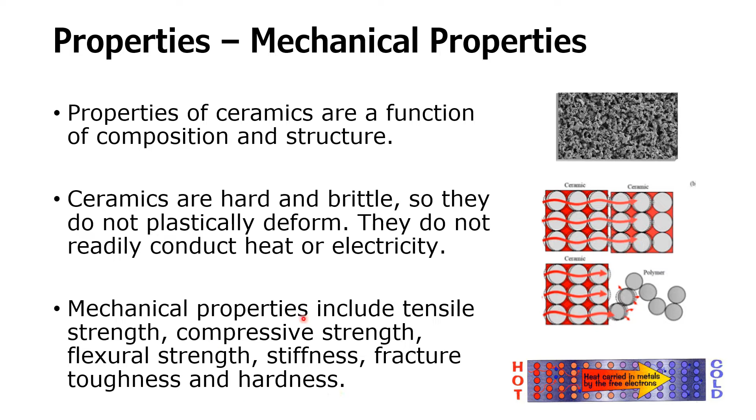This is showing ceramics and your plastic polymer here. Polymer is even more difficult. So for mechanical properties, we would take a look at tensile strength, compressive strength, flexural strength, stiffness, fracture toughness, and hardness. These are all the properties we'll take a look at in this unit.

Ceramic is composed of various sized particles, so when they fuse together, there are voids and small cracks produced inside of the ceramic body. So ceramics in tension or under tension, these voids are their weaknesses, and failure usually happens at these places where the voids are.

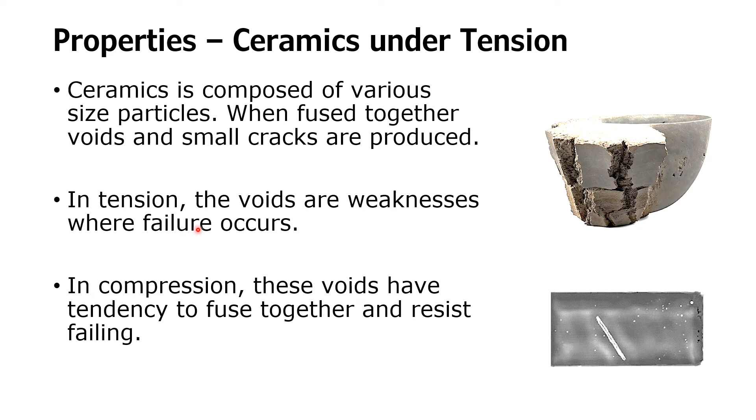In compression, these voids have a tendency to fuse together, and by doing so they resist failing, and that happens only in compression. For tension, failure will happen because of these voids.

Ceramics have been used for applications where resistance to compressive forces is required. So compressive strength in ceramic is many times greater than the tensile strength.

Some students may have difficulty if you're not an engineering student or don't have a lot of engineering or science background. Try to understand compression like these arrows - the force is going to go inward. Tension is kind of like that, when the material is applied some sort of stress or load. Compression going in, tension coming out. And that strength for this material is greater than that strength for the same material, meaning that it will compress more than it will go into tension.

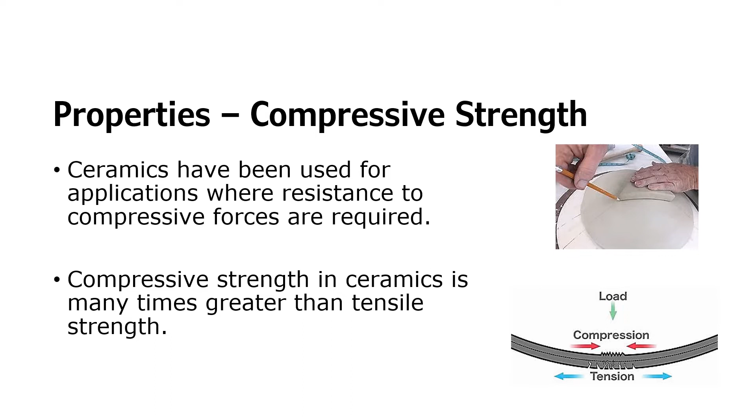So it's very possible to achieve high tensile strength - we can go from 0.7 mega psi to 1.4 mega psi in newly drawn glass fiber. Glass again is a ceramic. When we say fiber, we're talking about them at the molecular level. Big M is 10 to the power 6. So in practice, if you have a very small flaw in glass fiber, it's going to dramatically decrease that tensile strength, even if it can go so high. One single flaw can mess up everything, so you have to be very, very careful.

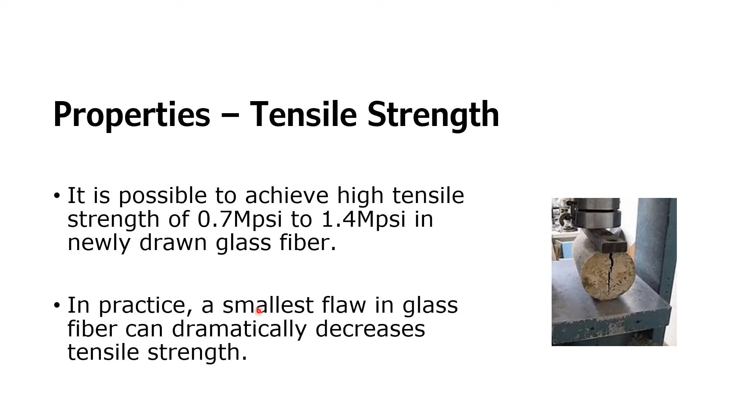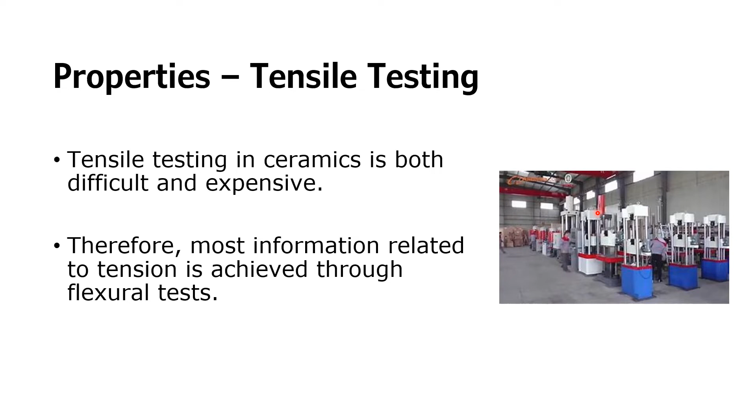We can test the tensile strength of ceramics, but the testing is difficult and also expensive. We don't call it tensile testing in ceramics - those tests are called Flexural tests. So all information related to tension of ceramics is achieved through Flexural tests.

The Flexural test is performed this way: you're going to have a beam of your sample, a standard size. It has to be a standard size because if you want to compare the tensile strength of different ceramic types, you need to have a reference, and we usually make the reference a standard size.

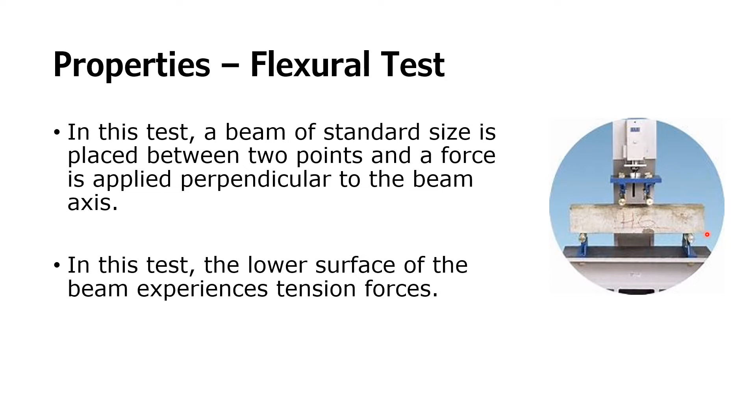You're going to place that beam between two points, and then apply the force perpendicular to the beam. So the force the beam experiences is going to be on its lower surface. Here you can see the beam, and the force is applied with this machine perpendicular to the axis of that beam. So the beam is going to experience the tension forces on its lower surface - don't forget that.

So flexural strength, we are going to calculate it by using this formula. MOR is modulus of rupture, and that is for the flexural strength.

We're gonna apply the force, the perpendicular force, and then your beam length, that's the ceramic length, ceramic beam, standard size length. You're gonna times with 3 divided by the width of the test specimen, that's your B, meaning like the width of that beam, and then your height. So your L, your B for width, and then your height H of the specimen, square your height, times 2.

So when you take a look at the mathematical equation here, you can see the flexural strength is inversely proportional to the width and the height square, but directly proportional to the applied force and the length of the beam.

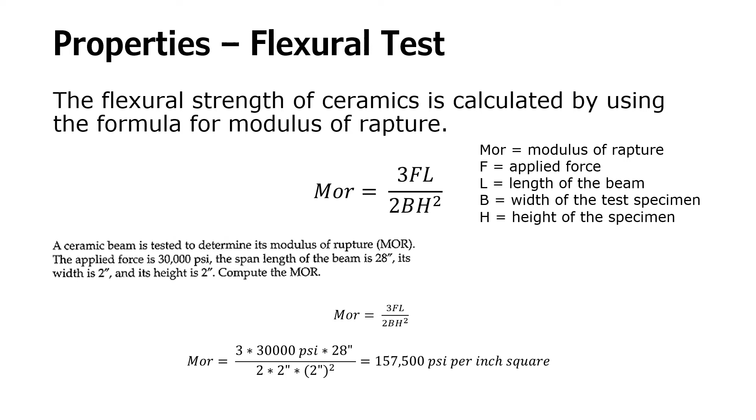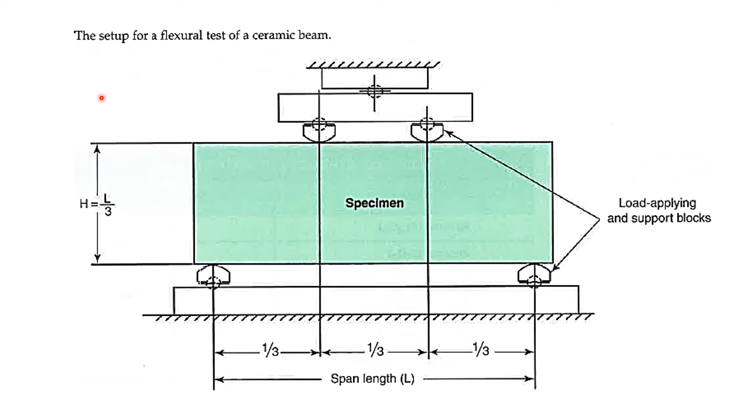So here is your load applying, and these are your support blocks. The force is going to go down that direction. Here they're trying to break it into 3 parts, 3 equal parts. So you have 1/3, 3 times of it. And here is the length divided by 3 is your height.

Alright, so this is another table, and it's showing you the flexural strength of materials. So the materials are that, and here is your modulus of rupture, and the unit is MPa. Alumina 380, and go all the way down to 1378 for tungsten carbide.

So tungsten carbide, where we use for cutting tools, the strength is the highest. If you look for the lowest strength, you can see right there, silicon nitride.

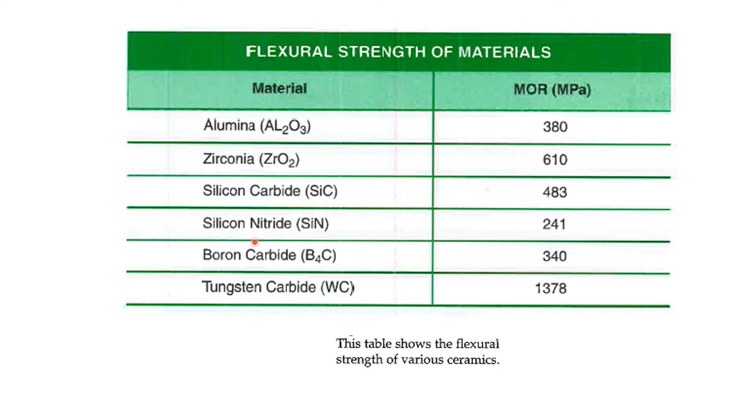Now we're going to get into another property called stiffness. Ceramics have the highest modulus of elasticity of all industrial materials, and they are the stiffest of all engineering materials as well. When you look at advanced ceramics, you can see they can achieve modulus of elasticity 3 times greater than steel. So even though it is clay, you can engineer it for elasticity greater than steel.

Ceramics are really good stuff if you know how to engineer them. The modulus of elasticity can be as high as 65 million psi compared to 29 million psi for steel. That's about 2 times the modulus of elasticity compared to steel.

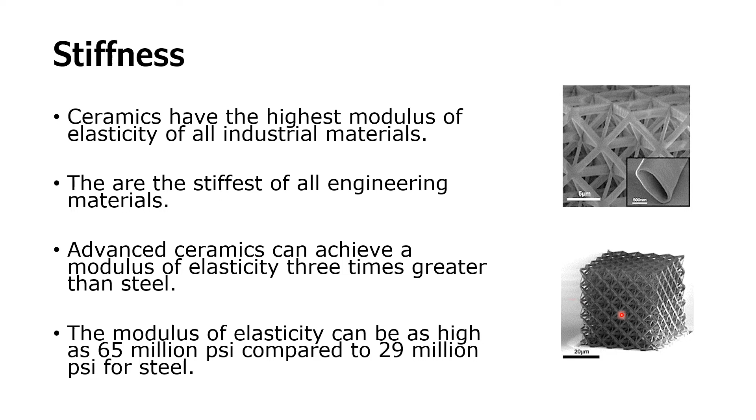This is just showing you the internal structure of a type of ceramics. You can see the crystalline structure right there.

Measure of stiffness, we use modulus of elasticity. You can use MOE like MOR, but for modulus of elasticity we use a different symbol. You can also write it down just like that. The formula says you divide change in stress, that's your sigma, by change in strain, that's your epsilon.

Temperature, heat, can affect the stiffness of some ceramics. Here I'm just showing you where it went off because of the heat. Just one example here, there are many. It's just showing you a very small section of the material inside.

Again, don't forget how to calculate modulus of elasticity, very simple formula. Don't forget this little triangle is telling you the change. Change is kind of like, let's say the starting point is your origin. I'm just going to give you a starting point, let's say A.

We can also use 1. The final point is 2. I'm just going to write it down. Minus, that is called change. So when you read delta, you have 2 stress values going on right there. I am writing the sigma as A right here so you can see it, just an example to show that.

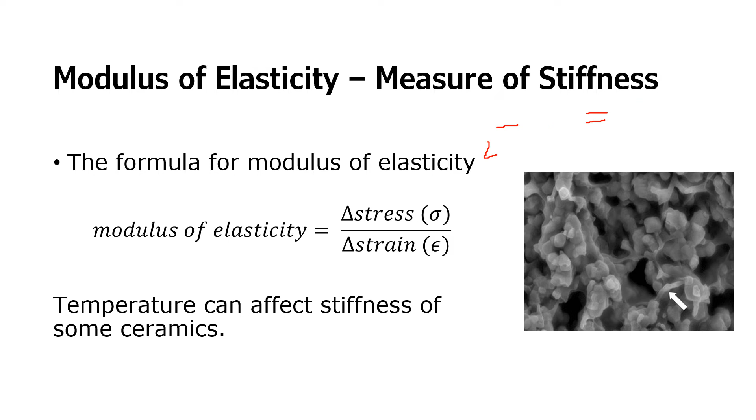Then we'll get into fracture toughness. Ceramics have the lowest fracture toughness, another property. They can only get to about 50,750 psi. So they're not materials of choice in applications where you need vibrations or impact forces, because they can crack. But fracture toughness of ceramics is being improved, for example by adding fiber reinforcement.

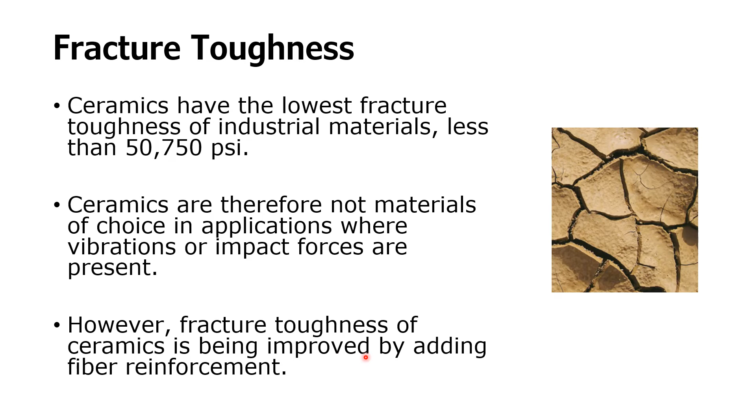Then we get into hardness. Ceramics are the hardest of all industrial materials. That's what we use for structures, for buildings, for construction. That's because of their internal structure and internal bonds that form extremely hard material. They also resist water. So ceramics make some of the best abrasive and cutting materials.

Don't forget your tungsten. Aluminum oxide, Al2O3, and silicon carbide, SC, are perhaps the most popular abrasives in use today. For example, sandpaper is actually made of ceramics, and that ceramic type is Al2O3. For blades and cutting tools, we've already discussed tungsten carbide, WC.

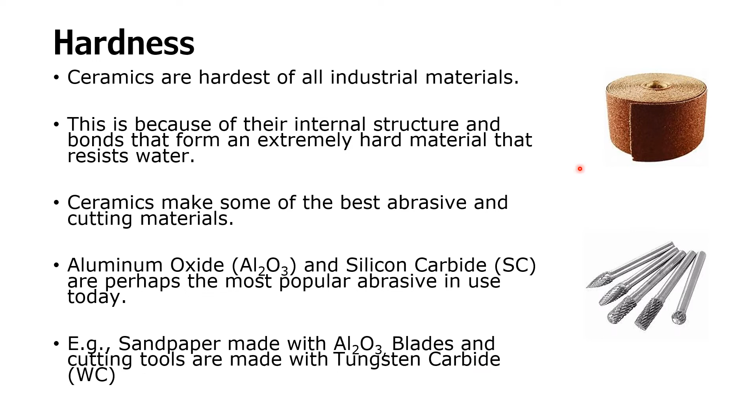So here's your hardness table. You can see the material type, including ceramics like aluminum oxide and silicon carbide, zirconia, and different types of ceramics right in there. I will point it out for you, 1, 2, 3. Here you will see the hardness values with the unit in MPa.

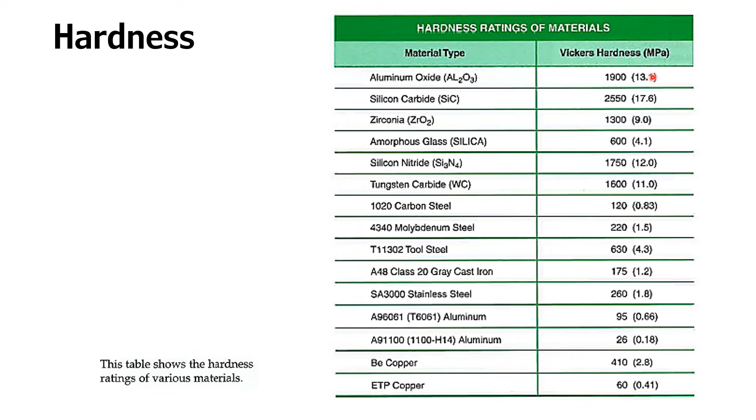Now we're going to get into thermal conductivity. Thermal conductivity of materials refers to its ability to transfer heat. And don't forget, heat is just a common word for the flow of electrons through a material.

Then they usually go by filling the empty spaces in their orbits. So don't forget the electron energy in the shell. So the heat is going to flow from higher temperature

to lower temperature. When you think about electrons in ceramics, they will definitely resist that flow. That's why when the ceramic conducts electricity, it's going to do it slowly. It won't go fast in it. That's because ceramic is resisting the electron flow from one location to another in the molecular structure.

And why is it happening? It's because they don't have a lot of space in there. So it's kind of like a tight ionic and covalent bond in there. So if they're already bonded, you don't have much space. So you have to wait until that orbiting electron is going to free certain places in the orbit. And it's a matter of luck also.

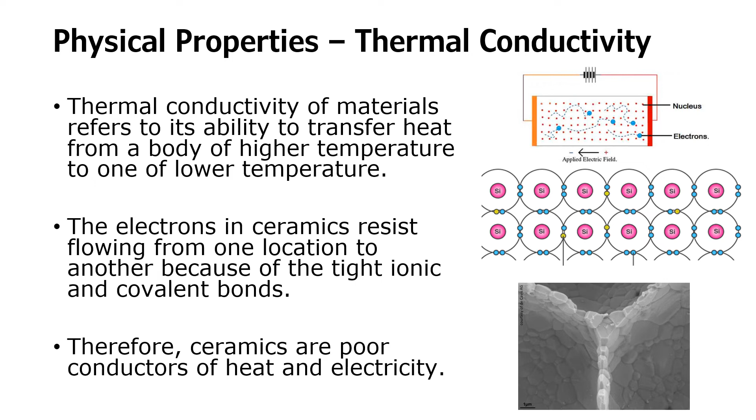So here are our familiar ceramics: aluminum oxide, silicon carbide, and tungsten carbide. You can compare the thermal conductivity, and you can see tungsten carbide is highest among these three ceramics. We also have other ceramics right here, like silicon nitride, and zirconia there.

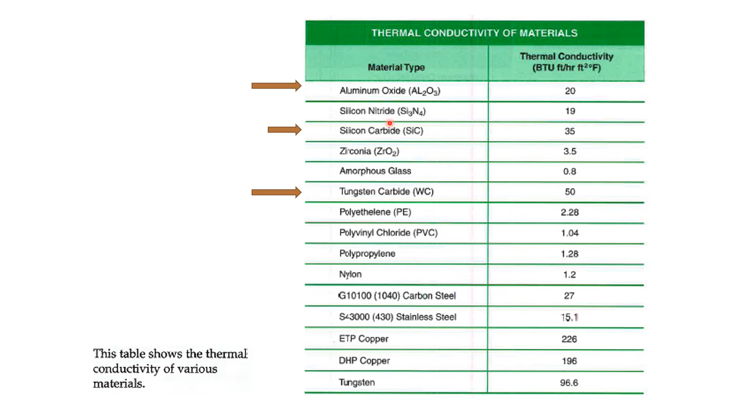Okay, so this is just a review. Thermal expansion is when the material's volume is going to increase if you increase the temperature. This is just going with the 3D. We did it in previous lessons with length. If you remember, we took a look at linear expansion, but that's just 2-dimensional. Here we're going to look at the volume, which is definitely going to increase if you increase the temperature.

So all materials, if you increase the heat, they're going to expand. All materials, if you decrease the heat, they're going to contract. For ceramics, of all materials, they have the lowest thermal expansion, meaning they don't expand too much.

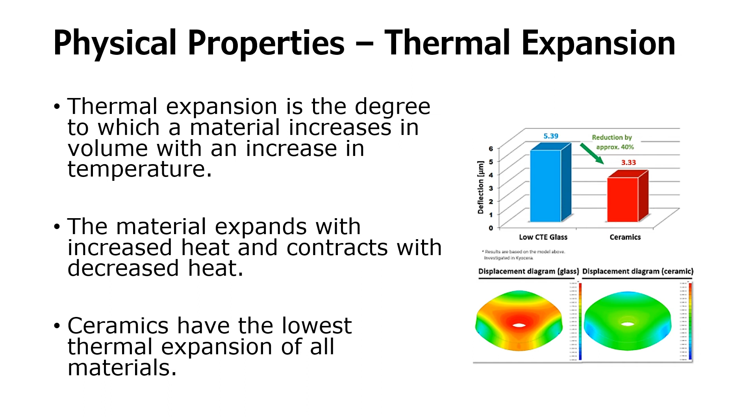Okay, how are we going to calculate it? So linear expansion, we go back to 2D again. Now instead of volume, we're dealing with length. It's the linear coefficient of thermal expansion. Again, thermal expansion, our symbol is alpha, is equal to, directly proportional to the change in length.

So every time you see the change, you already know you have an initial and then a final. And then you're looking at their difference, and that's your change divided by the initial length, L0. If you go initial with 0, you can go with 0 too. You can go with I, or you can also go with 1. And then you have change in temperature as well.

So therefore you have T2 minus T1 as your change of temperature. You can write whichever you want. You can also say T0 and TF, it's the same thing. So change in L equals, here we go with F and 0: delta T, F and 0. So final length, initial length, final temperature, and initial temperature.

But you can write it in any way you want. You can also go with A and B. Some students might even write D and C. Doesn't really matter, just a symbol. If you know the change is a subtraction of the 2 points, that's okay.

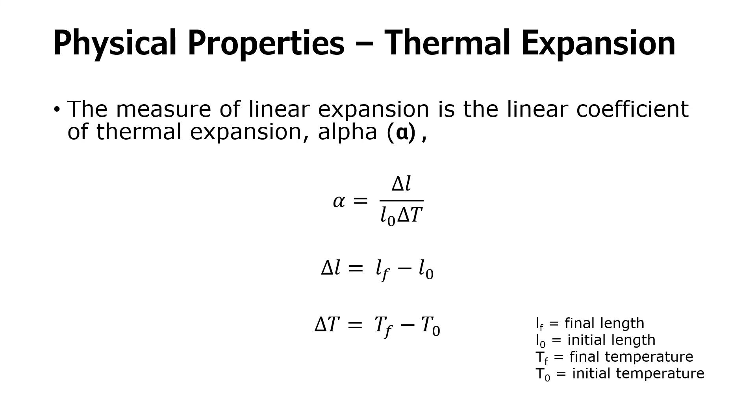Now we have another table right there. Here in this table, we're looking at the coefficients of thermal expansion, and here we have various materials. I'm pointing out what you need to pay attention to in this class: our ceramic types, aluminum oxide, and then silicon carbide and tungsten carbide.

Every time we have a data set, we're going to scan the highest and the lowest. So here we can see the highest right there, and double check. Then we're going to take a look at the lowest, which is right here, and then the corresponding material.

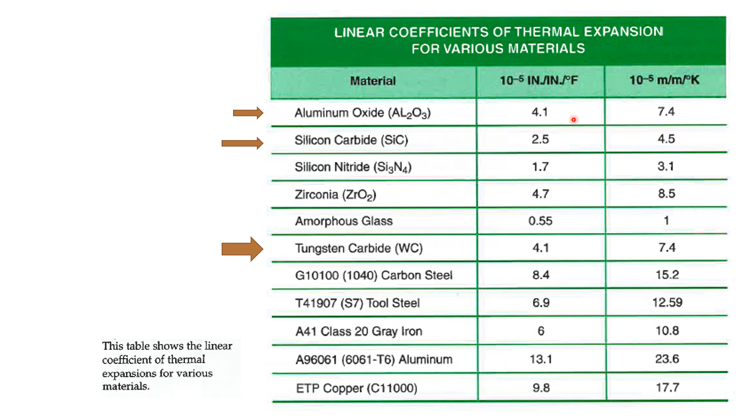Compared to other materials, they're kind of low, just by looking at it. So this is the same thing, the only difference is right there, we're going with a different unit of temperature. Most, in the United States, we use degree Fahrenheit. Other countries use degree Kelvin. And in the serious lab in the United States, we use this one.

Resistivity. So ceramics do not readily conduct electricity, therefore they have high resistivity to electricity, and that resistivity is again because their structure is filled with electrons, they're very tightly bound, that's why.

So here's a cartoon, and this cartoon is just showing you how to understand resistivity. Resistivity depends on the length. If it's too long, the flow is gonna go slow. And if it's too thick, we also have an issue. If it's too small, also have issues. So therefore resistivity depends on the thickness.

It also depends on the temperature. If it's so hot at one point, electron flow is not gonna go, you're gonna have some roadblock right there. If it is so small, electrons have an issue going through as well because the space is limited.

So formally, the electrical resistivity of a material is nothing but its ability, ability is something that an object can do, to resist the electron flow. And all of us, including objects, living things, non-living things, we have two major things going on in ability: the ability to move and the ability to stay. In other words, the potential energy and kinetic energy.

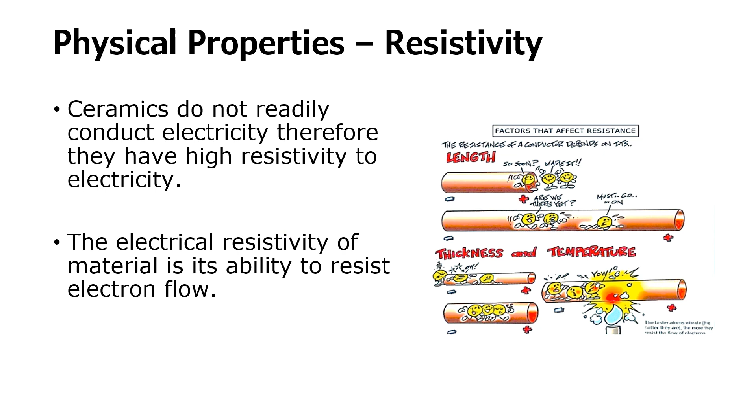Okay, I am going to stop right here for part 2. Then we will get into part 3. Part 3 is just a little bit, I'm trying to keep the slides around 20, 22, 21, to group them together so you can be able to get it in a systematic way.